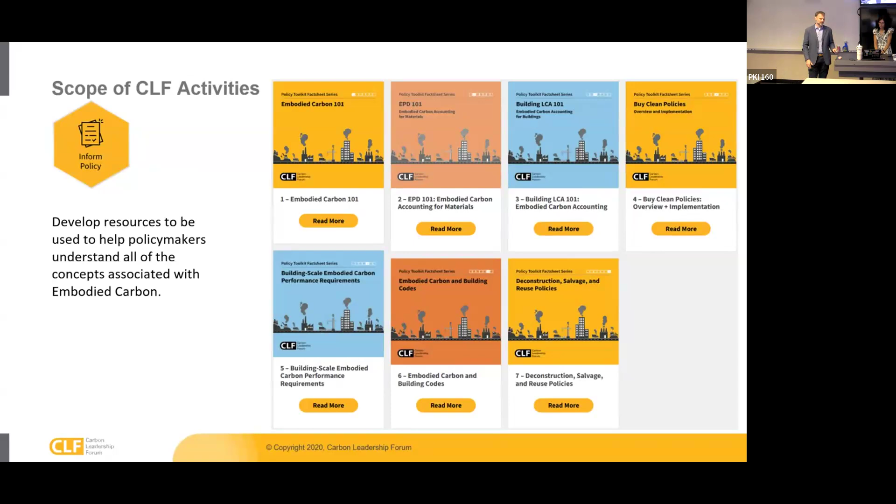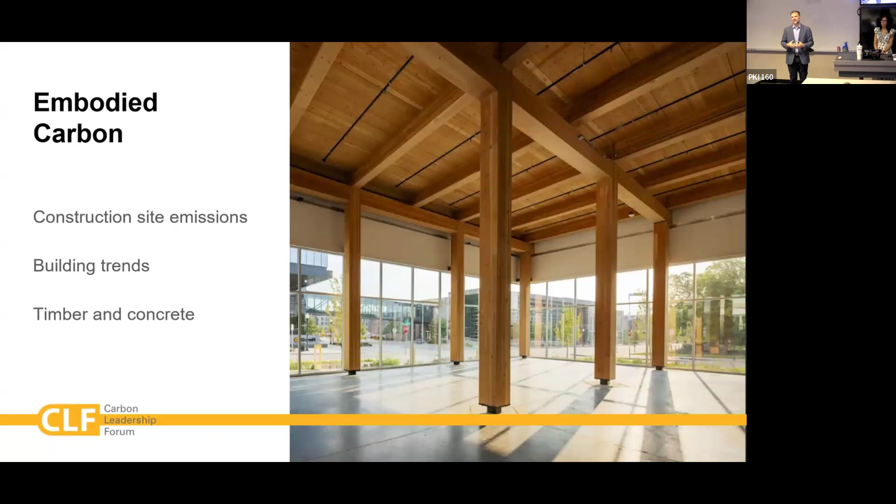So that's an intro. Today we're talking about two sides of this challenge. I'm excited to talk about some of the technical components that comes down to materials and how we use them, and I'll also talk about some of those trends I was just mentioning. You're going to get what, in my mind, might be a more important view, in terms of what's driving this change from the perspective of organizations that have set goals or maybe even experience mandates to reduce their emissions. Frankly, that's who hires companies like mine, and we don't get to do our work unless it's being driven and motivated by corporate initiatives. So I'll pass the baton there.

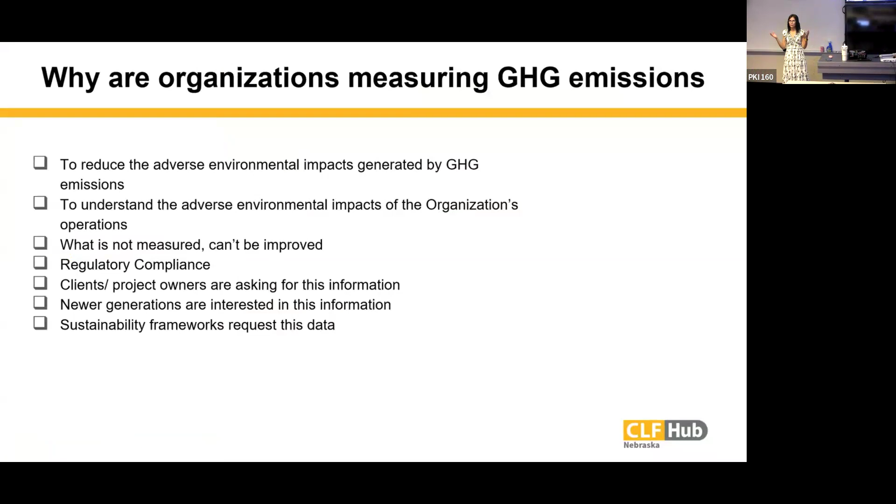I'm going to time myself, I want to make sure I don't steal time here. Okay, so let's start with a common question: why? Why is tracking greenhouse gas emissions important, or why is it happening? Well, as humans, we need to reduce our adverse environmental impact to the environment, right?

So we need to account, okay, we're already having an impact. How much is that impact? How big is it, or how small? What is not measured, we know it cannot be improved.

We know that we need currently to comply with regulations. As some of you might already know, we have regulations in Europe and some here in the US, Canada, and other countries that require us to disclose greenhouse gas emissions. An example of that is the SB 253 from CARB, California. In 2026, we will need to disclose greenhouse gas emissions as Kiewit as a company, but also other organizations.

Why is this? Well, newer generations are asking how companies are treating their employees, the impacts in society and in the environment. How are you doing as an organization? How are you supporting us as human beings?

Our clients are asking for that information. What is your impact? How much waste do you produce? How much energy do you consume? What are your greenhouse gas emissions? And a lot of public companies are required to disclose this information also through frameworks of the SEC. So these are our drivers.

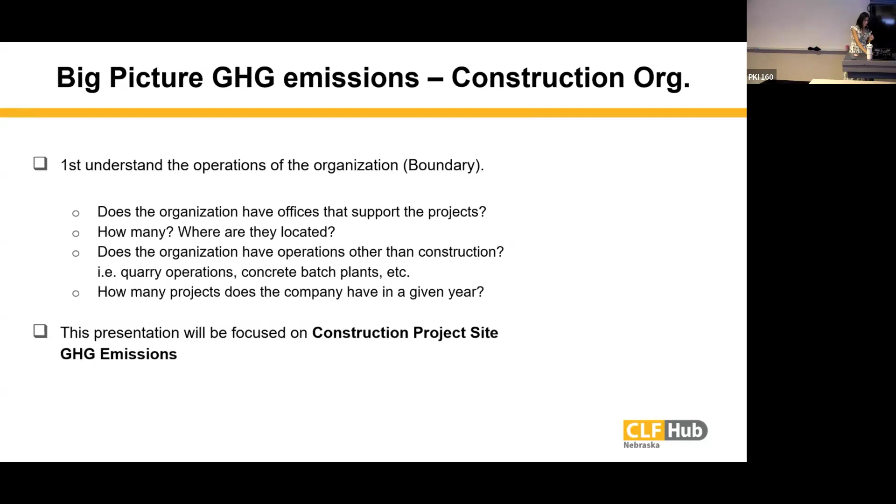So I like questions. At the end of the presentation, we will be able to answer some of your questions, and I hope you have a lot, because I love the interaction. But now I'm going to start asking you guys a question.

What are the sources of energy during the construction phase of a project? Any idea? Making light fixtures? Yeah, that would be from a manufacturing plant. Diesel. Fuel from equipment. The emission of carbon during the hydration process of the cement. Oh, I like that one. Yes, emissions of carbon while we process concrete.

Here is a list. So fuel from the equipment, the equipment is using fuel to operate. Natural gas or propane: we have trailers supporting the project site or offices for that specific project, and they need heating, whether it's propane or natural gas.

Electricity, right? If we're connected to the grid, are we having some renewable energy out there? I decided to put refrigerants last. Refrigerants are not a source of energy, but they do affect, or actually emit, greenhouse gas emissions, so that you know about it.

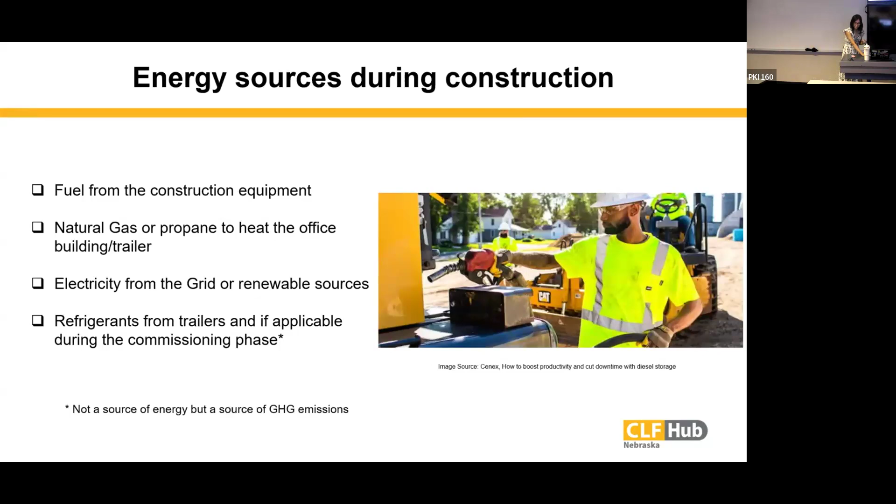But Paulina, where do I find these numbers? Question for the audience: where do we get the number of gallons, kilowatt hours, gigajoules? Tell me.

Excuse me? The engineering management. Engineering management? Anyone else? Electricity is going to be on the electric bill. Yes, in the invoices, right? That's one of other options.

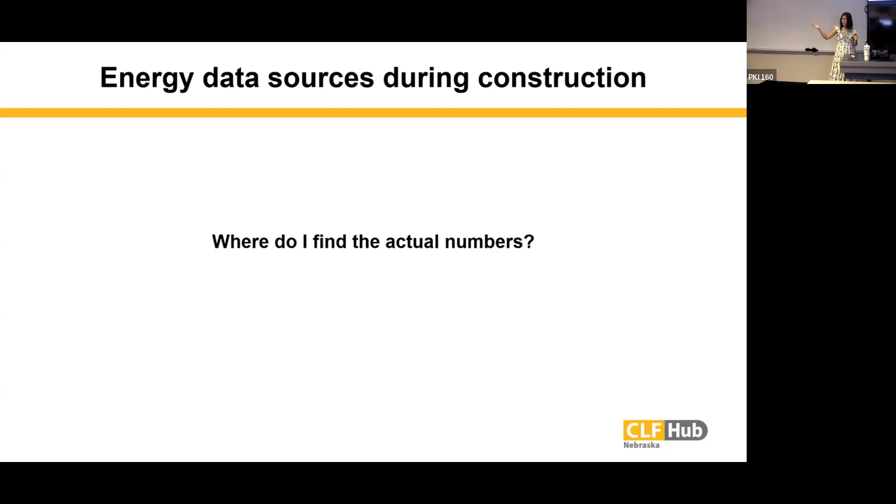So invoices, right? There are some systems in place that organizations have where they actually track this data in the system, for instance ERPs, SAP, Oracle, if you've heard of those. Utilities websites, whether it's not a physical invoice, but an actual website that you can read the measurement. Submeters on site: is somebody actually going and reading on a frequency basis, hey, this is the amount of electricity that we're consuming.

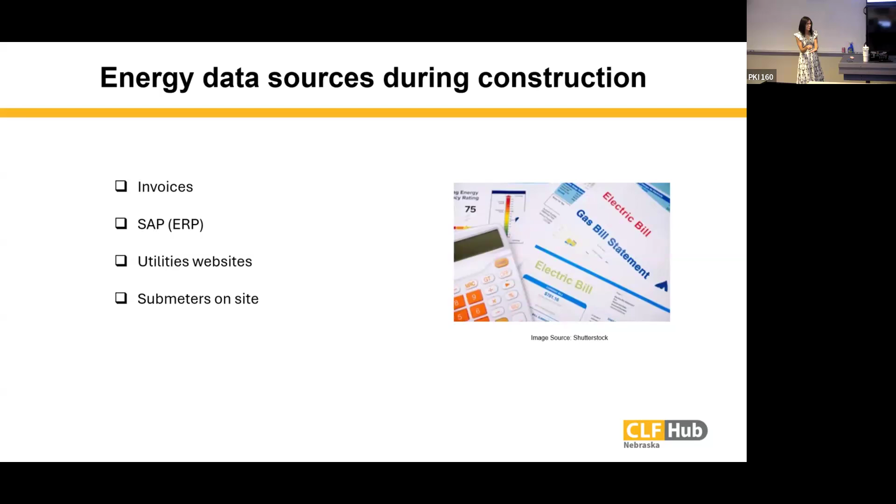So it seems to be relatively easy. We already said, hey, these are the projects that we're going to account for greenhouse gas emissions. These are the energy sources. This is where I'm going to get the data, invoices, or whatnot. And doesn't that sound easy? I mean, let's just do that.

But when we're talking about projects, are we talking about just the one project? How many projects do construction companies have in a given year? 300? And you guys know that projects can go as short as 1, 2, 3 days to 10 years. And they're moving, right? Today I have a project here, tomorrow in Canada, and then I have another team in Mexico. How do I manage and align?

So challenges, every project is different because every project has its own scope. We need to understand what technology out there is available, for how long do we have to track information in the projects. People are rotating.

Let's say about systems in place. Does the company already have a standard procedure to say, in all the projects, we will have this job position, assign this task to track fuel consumption? And if not, how do you communicate that? How do you standardize it? Where are they going to track this information?

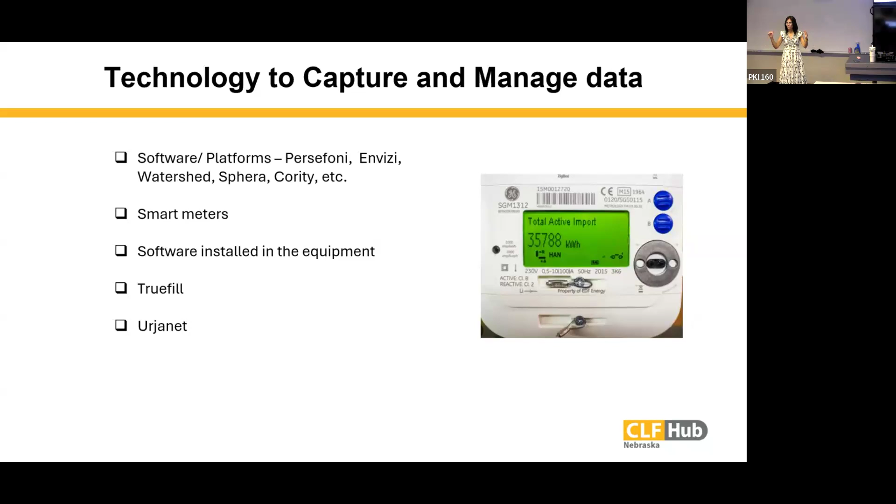Hey, is there any software, hardware that I can connect to the equipment that can actually tell me how much fuel we went through? Truefill and Urjanet. So Urjanet is this one system, website, that gathers the data from different utility companies and can give you the report for the companies that you want. So if I have 100 projects, I make sure that they are all providing me with access to the utility companies, and then I can download actual data from that report. Instead of having a person printing or filing the invoice, tracking it in SAP or in Excel so that it gets paid.

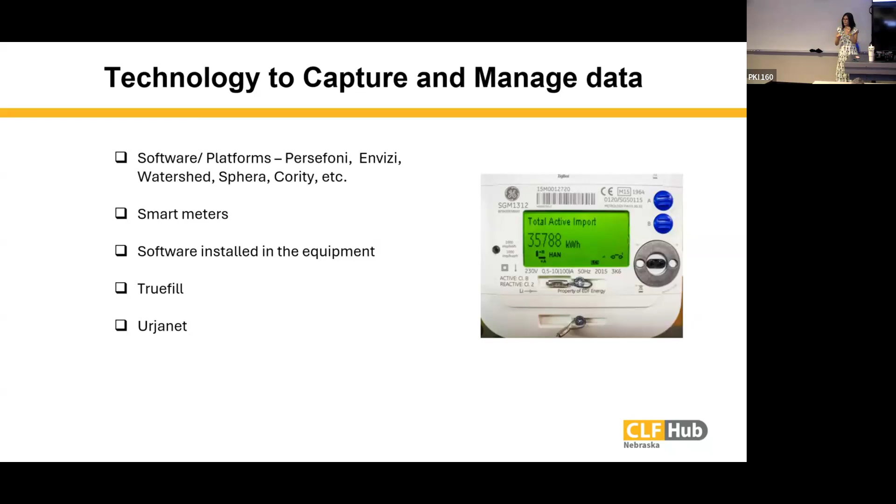I'm not going to go into detail on how to calculate greenhouse gas emissions, but wanted to make the connection of energy with that energy consumption, whether it's gallons of fuel, gigajoules, kilowatt hours. Then there is this greenhouse gas protocol, which is very well used, that guides us on how to calculate greenhouse gas emissions. And there are databases that we use to convert these energy numbers into greenhouse gas emissions.

Here to mention some is the TCR, the DEFRA, the EGRID from EPA. They are not the only ones. I'm just sharing an example.

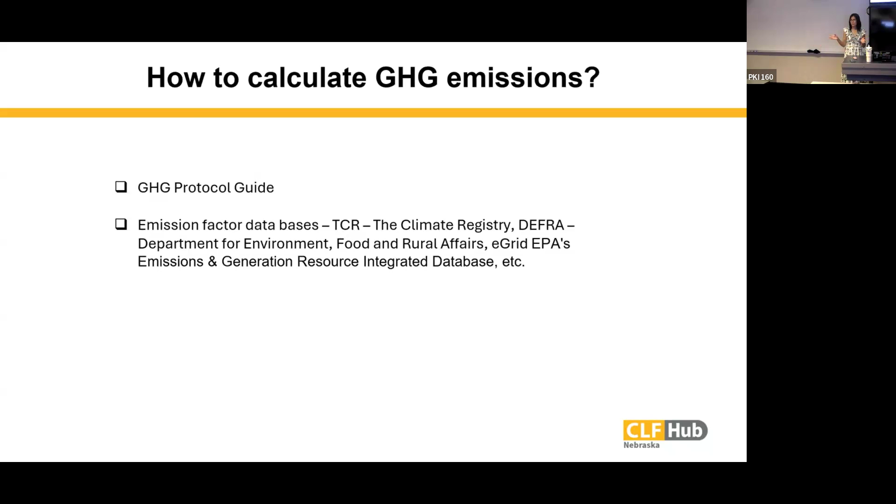Challenges for reducing fuel consumption: we're talking about the data tracking. How do we track the data? How do we standardize processes? We need to make people aware about how, in our operations, we are emitting greenhouse gases, right? How do we train them? What policies do we have in place to reduce those greenhouse gas emissions? And within the next slides, I'll share with you some of the practices we have in Kiewit to help support the effort.

The problem of working in remote sites is something I will also talk very fast on. But if we are trying to go to electrification of my construction fleet, and I am working in a remote site, how do I actually use that electric fleet if I cannot even connect to the grid? Those are challenges.

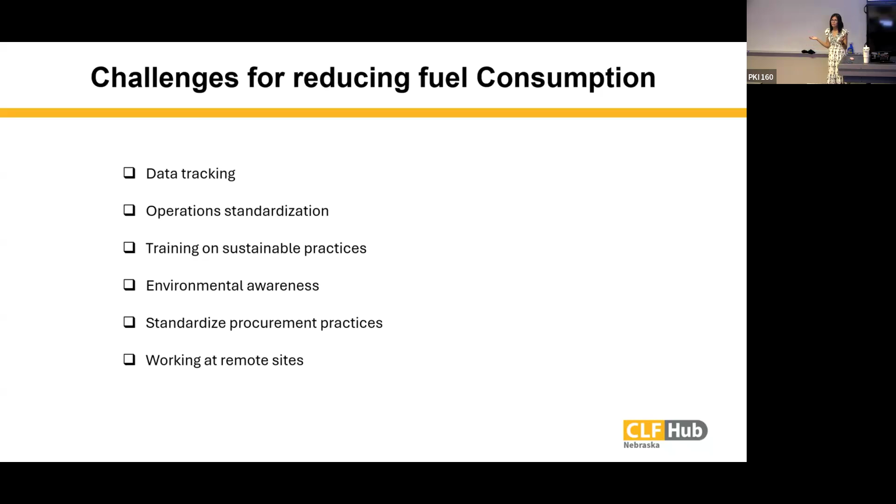So finally, I just want to showcase Kiewit's actions in relation to greenhouse gas emissions. So since 2009, we have prepared our greenhouse gas emissions inventory. We already have it third-party verified, which means we get audited on how we're calculating these emissions, right? What is the methodology we use? What assumptions are we considering in this?

Not surprisingly, our main source of scope 1 emissions, which is our direct emissions as a company, is the fuel consumption, specifically diesel. So we are working very closely with manufacturers so that we can try pilot projects to see if with the new technology that they are putting in their equipment, we can reduce fuel consumption.

I was talking some about how can we reduce fuel consumption, specifically challenges. Are there policies in place in the organization? We do have a policy, the anti-idling policy. It tells us that we should not idle for more than 5 minutes. This helps us reduce fuel consumption, noise for the community, right? Costs, and greenhouse gas emissions.

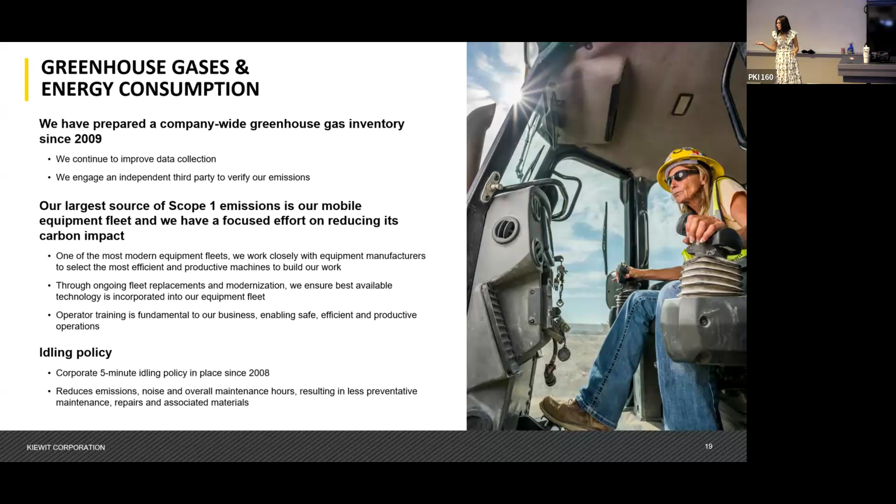When we're talking about other things related directly to fuel, what are you doing to reduce your adverse environmental impact? We're looking at ways we can use renewable diesel and biodiesel so that their use affects the environment less.

We're adding battery electric vehicles and energy storage systems where possible, as I mentioned. If it's possible, we'll do it, depending on where we're talking about.

We have machine control technology that tells us how frequently we need to give preventive maintenance to the equipment, so that it continues to be efficient and we reduce fuel consumption too.

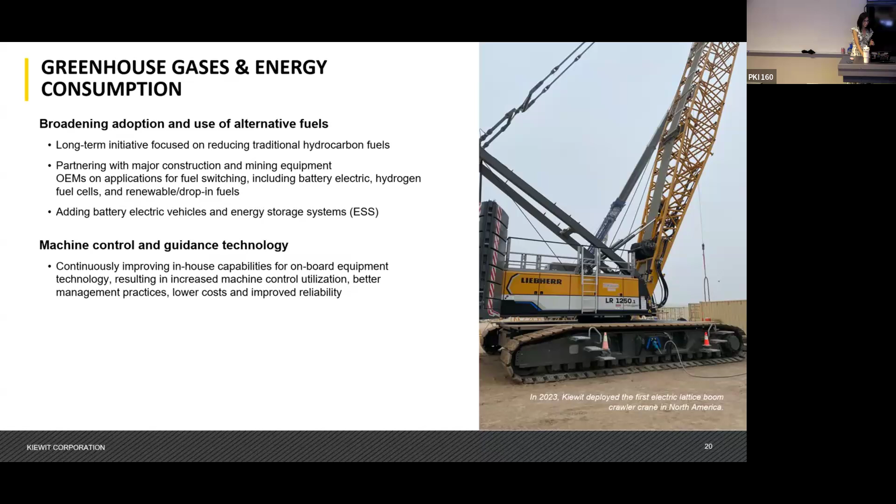Something I want to point out as a last comment relates to our data analytics. I was telling you, wouldn't it be great if we could capture the fuel consumption per piece of equipment? I think that's amazing. Well, we've had telematics for years as a company, since 2014.

Does anybody know what telematics is? It's hardware and software that we install in pieces of equipment, and it gives us different data about the equipment. An example would be: how much fuel did the equipment use? How many hours did it run? When was the last time I changed the oil?

Or whether people are putting on their seatbelt for safety reasons, etc. And then we capture the data and we can follow up accordingly, or play with the data and do the analysis.

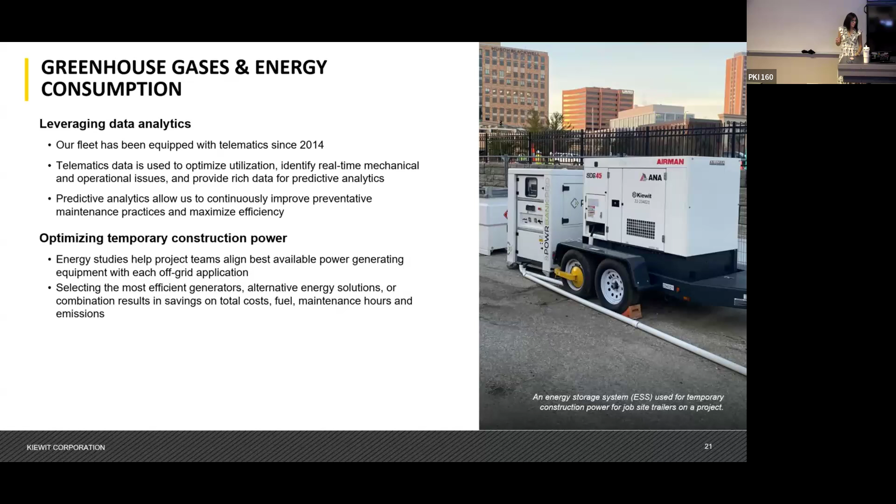And then finally, very fast, I just wanted to share with you that we are electrifying our fleet. One of the challenges is we cannot just go from day to night in electrifying our fleet, because first of all, there's not a lot of construction equipment already developed and manufactured that is electric. We will also need to connect to a grid, and we currently work in remote areas.

Think about the time it takes to charge electric equipment in construction. Would we need to wait for the operation to happen because that equipment is charging? Imagine the delay on the schedule. So those are things to consider when we're talking about electrifying our fleet. Thank you.

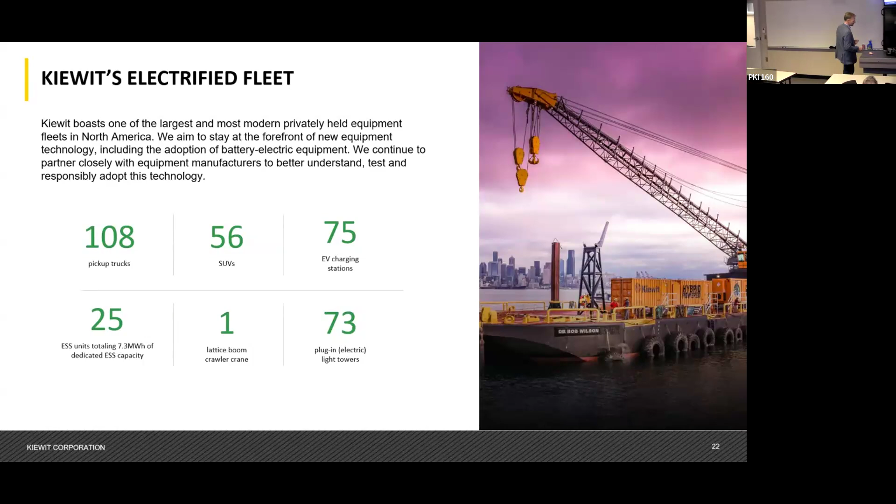No, we have until 1:15, but yeah, it's great if we can. Okay. Yeah. The 1 o'clock is a good time. Okay, great.

If I summarize what I want to share today, it would be that we need engineers to help us move beyond energy to address emissions, which is technically kind of complex, but it means getting beyond just the part we control, understanding the systems we're a part of, like what this map is, where energy is produced, how energy is produced.

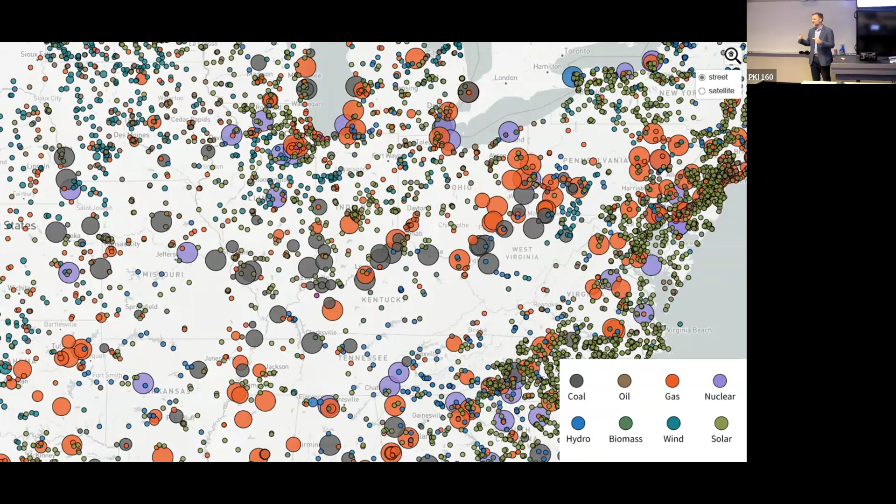The other thing is I think we need engineers to reach out more to our counterparts, like in the corporate world, where we're starting to see accounting practices incorporate emissions impacts, but also to ecologists and environmental scientists, because carbon isn't enough. In fact, if we focus on carbon only, we might be making bad choices from an endpoint analysis. I'll say that again at the end, but that's what I'm hoping to share with you today.

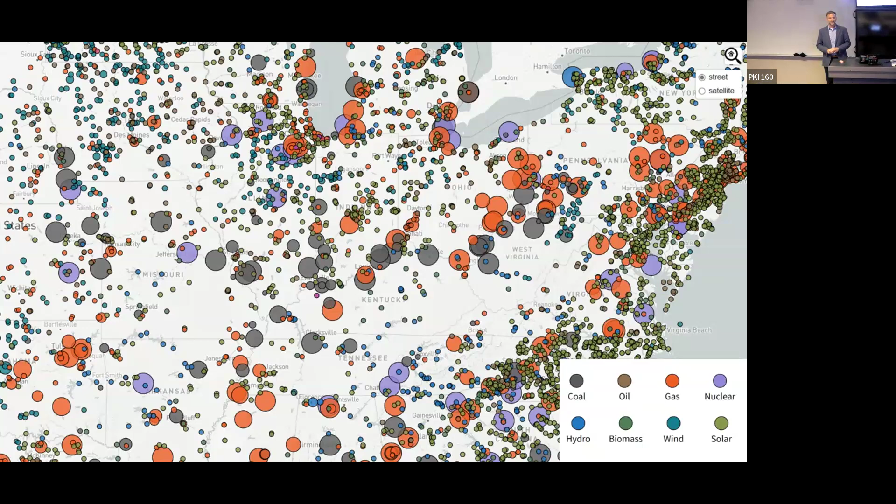This just shows the gray dots—that's where we're still using coal. I think the orange dots are natural gas, which is what we're trying to shift our fossil production towards. And then nuclear, we're working on micro reactors and small modular reactors. Those are exciting things for engineers.

The challenge with energy is when we can have it from these sources, and this is part of what we need help solving from a storage perspective. Buildings don't just take now, buildings also give—they're sources for energy production. We put renewables on buildings, especially solar.

But we're also putting back electric batteries, battery energy storage systems, and thermal energy storage in buildings too. And those are interactive—they can be dispatched remotely. Increasingly, I think we'll see utility companies providing incentives to gain access to those private resources to improve grid resilience. So this is what I mean by engineers needing to go beyond just the energy component.

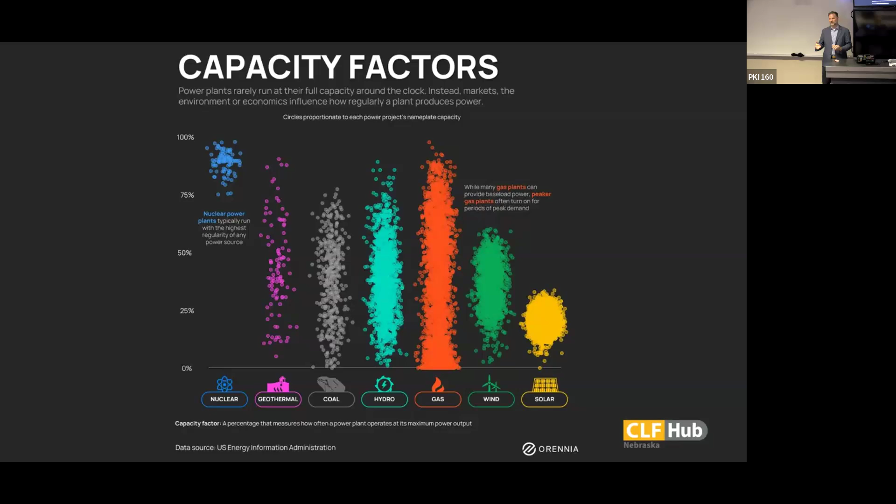Net zero isn't meaningful from an energy perspective, because the energy you get back to the grid may be different in quality than the energy you take from the grid, depending on when, right? The time of use matters a lot.

And let's see, did I jump? Yeah, so this is just to let you know that we have predictions on what will happen too. This is scenario planning, which engineers increasingly—I think we're designing assets for at least a couple decades, hopefully more—so our assumptions should be based on some reasonable scenarios.

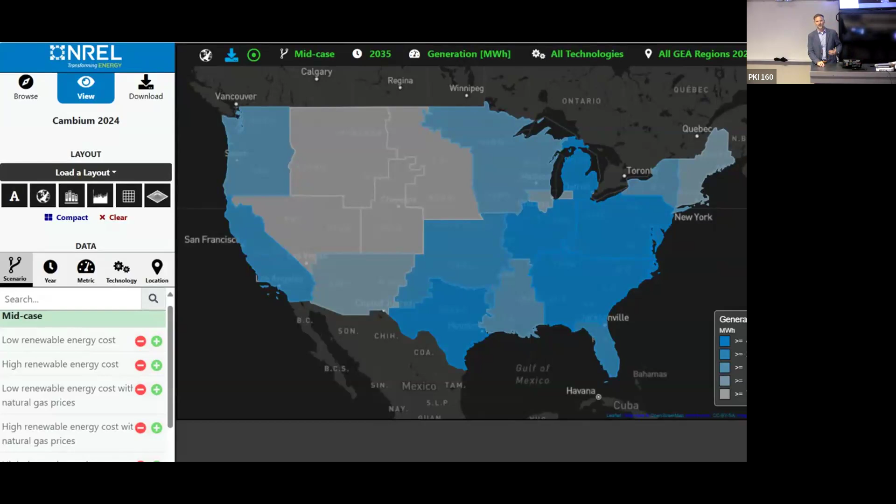NREL provides the scenario viewer for the electricity grid, which projects what emissions will be like. So when we're making decisions about the emissions impact of, say, putting in a heat recovery chiller versus geothermal water-to-water heat, we make these technical decisions. Looking at the current state of the grid for what the ecological impacts are isn't going to be predictive enough—it could potentially be very wrong in terms of your estimates.

I want to talk a second about energy, because in my career, energy has been the focus. I spent a lot of time optimizing enclosure systems, getting rid of thermal bridges, passive design, and then optimizing systems. We've all heard reduce loads, then optimize, then renewable. We've learned all about energy, but we have a ton of it. In some ways, I think energy use is correlated with quality of life. We don't need to necessarily be afraid of energy. It's an abstract thing.

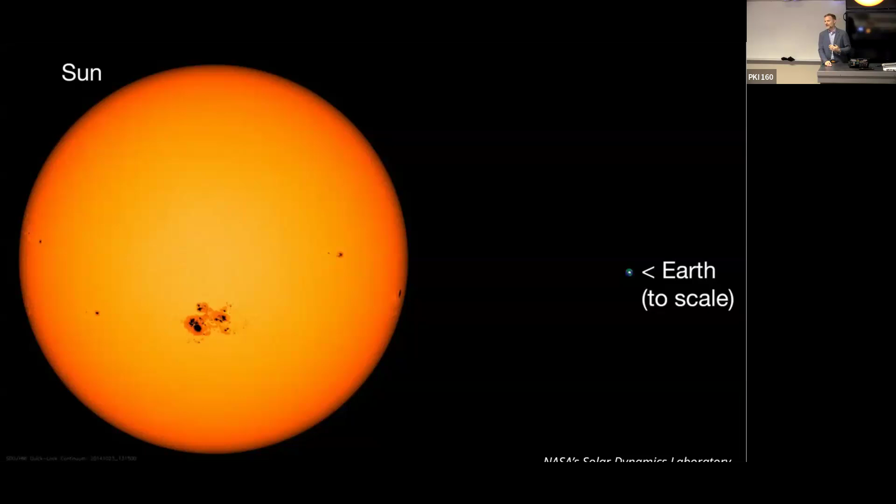This is just to let you know that there's a science here that we need to begin engaging with. That's what I mean by connecting engineers, reaching into the environmental world and this science of life cycle assessment, where we are directly impacting these midpoints, which are all these little items. Global warming potential is one of them. So the Carbon Leadership Forum is currently pretty focused on that, but CLF brings this approach.

When you study the emissions impacts, you're actually dipping into this literature, which is very rich in terms of our ability to also address water quality, toxins for humans, and these other endpoints that actually are what we care about. So not getting hung up on energy or carbon per se, but how are they ultimately related to quality of life?

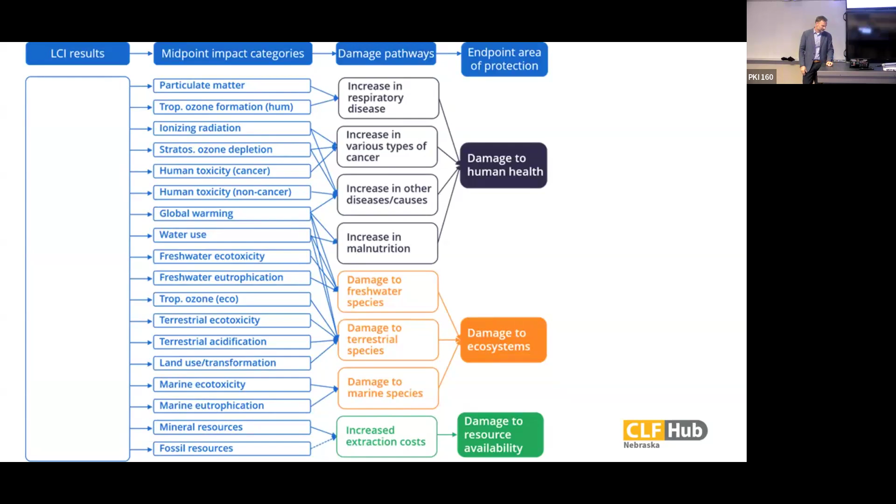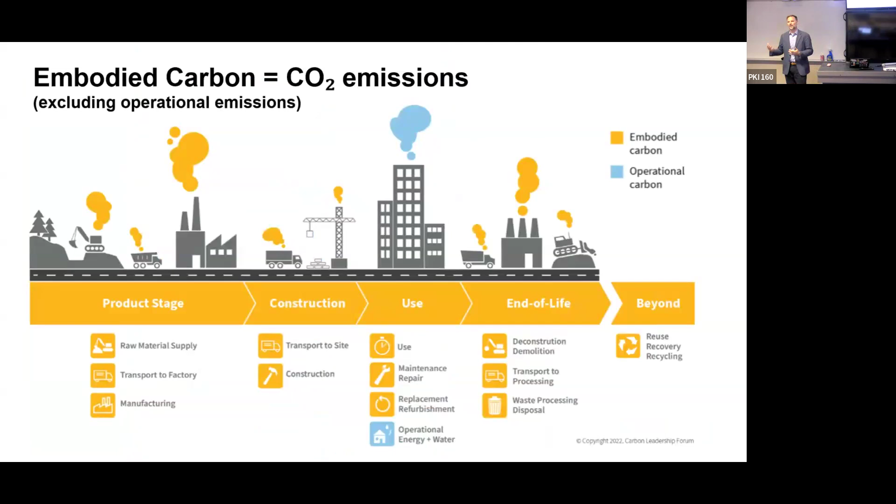And the complicated science of scenario and Bayesian inferences and things necessary to connect those. When we talk about CO2, we talk about the whole life of a building. The Carbon Leadership Forum is really focused on the upfront emissions because they happen right now, and there's direct market signals we make with direct emissions. So there's an urgency that's not as compelling as operational emissions, because those are predictions we're making about what will happen.

And we have goals that are pretty clear. The AR6 report updated it to know how much our budget is. So it's not like we're just trying to reduce to be good stewards. It's that we're actually trying to stay within an allotment that there's been global agreements around, right? We've made commitments as a society, as a nation, to our nationally determined contributions.

And the Science Based Targets Initiative has made this really simple for you. Buildings cut across many sectors in our economy, and the United States budget for emissions up through 2050 is split up by those sectors. There's not a building sector. But Science Based Targets just recently, last year, did the hard math of figuring out, if you just looked at buildings across those sectors, what would the budget be for different types?

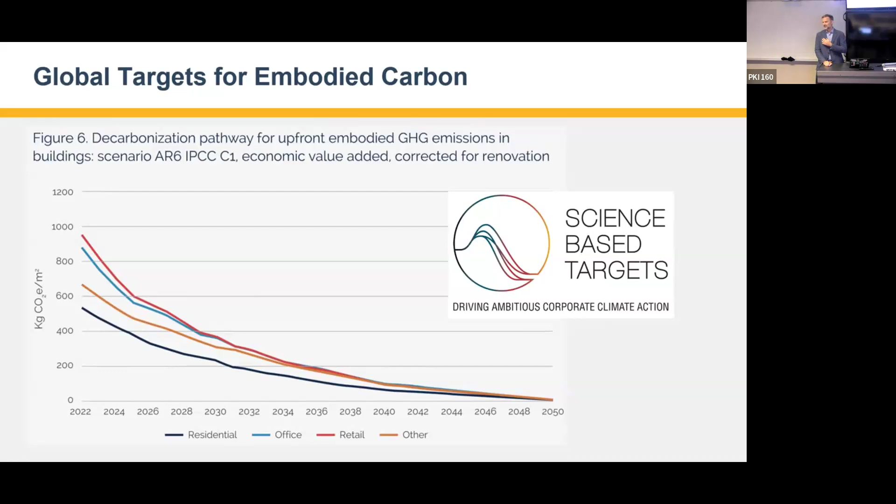So those different colored lines are different types of buildings. And if you look at a different country, the chart changes also based on what that country's nationally determined contributions are to the budget. So where you do a project matters for how much emissions you're permitted, and what type of building is actually an important factor too. This is very knowable information, even though none of us are currently really using it. It's becoming more knowable with all the legislation we're seeing. This is a bit outdated now, but this is a graphic that shows California leading the way.

Europe has been requiring the CSRD for at least 5 years now, which first targeted operational performance for buildings, but now has also started to tackle these other upfront components.

Kiewit, what's CSRD? Corporate Sustainability Reporting Directive, I think. Thank you for that.

That's a cross-cutting measure. Again, most of the legislation is aimed at states that have taken the initiative, like California, which a long time ago, probably at least 5 years ago, committed to buy clean for its own state facilities. But only recently, I think 2 years ago, through CALGreen, did they make that a requirement for all construction projects, that they meet the buy clean thresholds for concrete, steel, insulation, and glass.

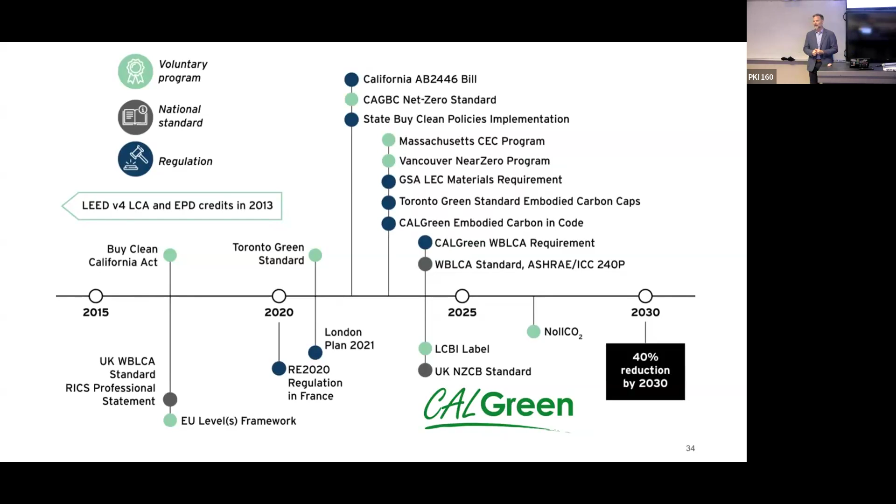So that point was let's get smarter about our emissions, because while it's complex, because of the dynamics of time, like year over year, we're designing assets, and the dynamics of our grid seasonally and even daily. Those are all variables in this equation that engineers have a direct influence on.

So if you just look at energy, you're missing the importance of those ecological impacts. But engineers are well positioned, especially at the building level, to tackle this. I'd say maybe even more so than folks that are managing those systems, you know, the utility providers and the district energy managers. They have to deal with the loads that are coming from the buildings, whereas the engineers can help manage that.

So let's get into a little bit of detail. Concrete's the largest source of construction emissions currently. And concrete's a composite material. It's pretty hyper-local. The batching plants that mix up concrete and send it to the site are normally within 15, 20 miles of the project. But that doesn't mean that all the ingredients to the concrete are hyper-local.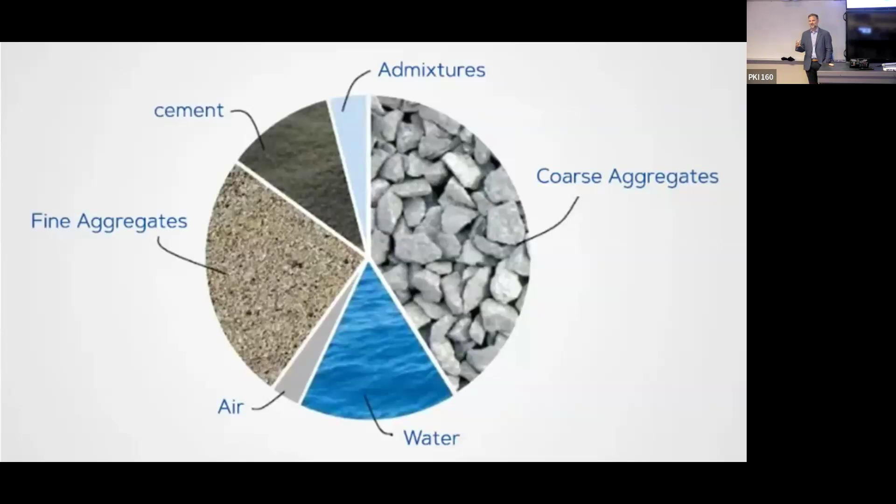Cement is the most significant contributor to pollution in concrete, and you can see it's a fairly small portion of the actual mass of the finished mix. But as the binder, it's the most important part also.

So you can think of this as sort of the people who are paying the cost of our concrete use, because there's an equity and social justice component to this also. It's not just carbon that's emitted from the production.

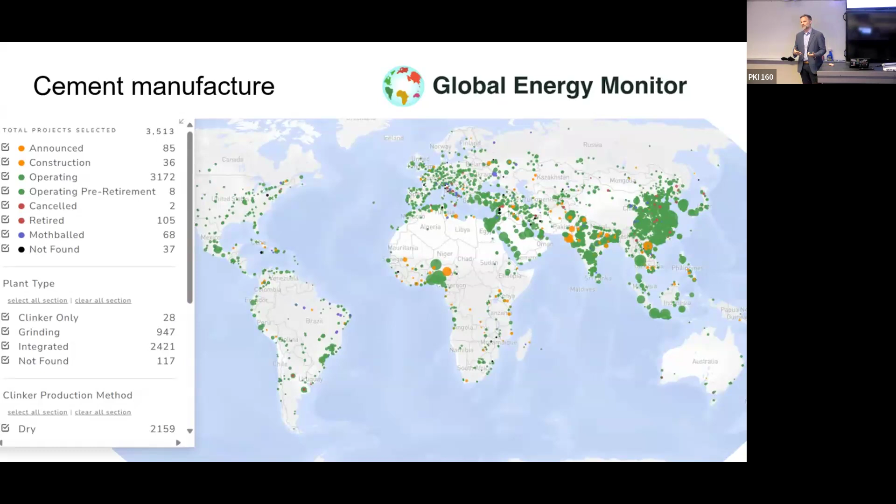Clinker is what you use to make cement. You grind up the clinker. To get clinker, you have to melt limestone. When you melt the limestone, it produces a lot of emissions, and it takes a lot of heat, which typically produces a lot of emissions too. So even if you electrify somehow the cement production, you still are having a huge amount of emissions just because you have to melt limestone in order to create the hydrolysis of that reaction.

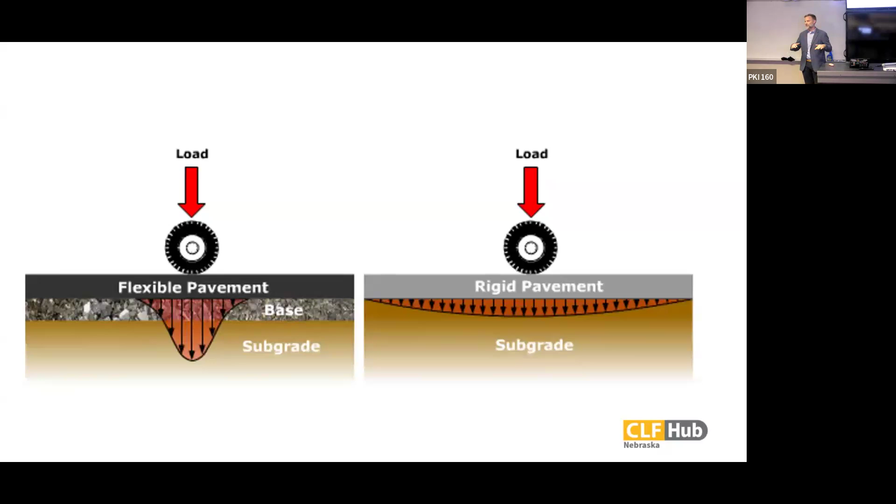So one side note is it's not the only binder in town. We do have, especially for exterior, for outdoors, flexible pavements that we use a lot. And these have a much lower embodied carbon. I'm realizing I put in a GIF, that's kind of fun. But you don't have to design rigid pavements.

And this is probably one of the easiest ways where you can switch out of concrete. That's a smart choice. We'll talk about timber next as one of the key options you have as a replacement for concrete in structural design.

You feel like taking questions?

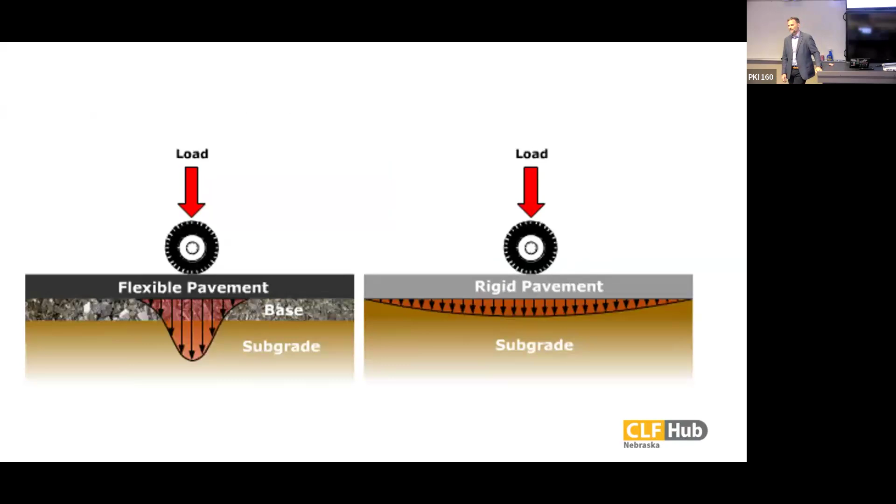Yeah. In the last slide, it occurred to me, does a flexible pavement have a drawback that it requires more power to the car to drive across it because of more friction? Maybe, but you know, they take that into account in the LCA studies. They talk a lot about vehicle lane miles and stuff like that. When they talk about the use phase of a product, they include the differences in performance during the use of that lane and mile of highway or whatever.

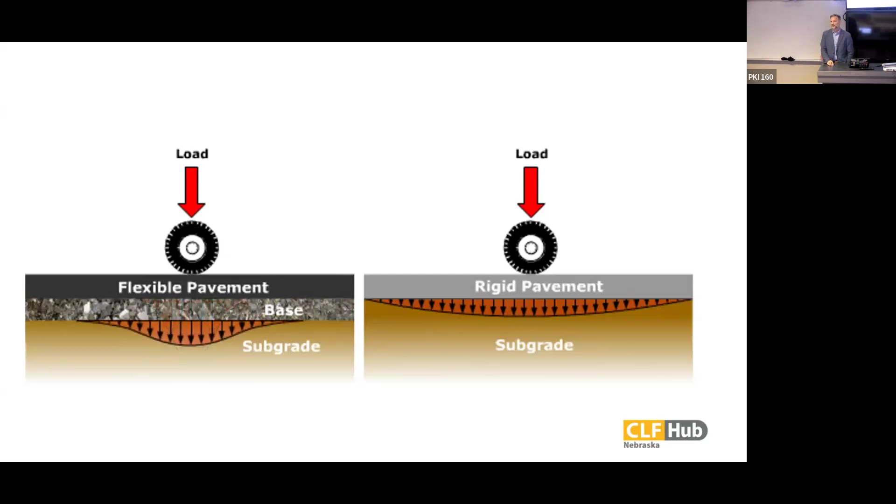So yeah, there's a rich literature here for us to draw on. And I don't think we can become experts in this, but we need to find our experts and help support that emerging industry so that we have more consultants capable of helping us bridge to this science of ecological impact. So we have a lot of options for other binders.

A lot of these are unfortunate replacements, like fly ash. We get fly ash from coal plants, so creating a strong secondary market for fly ash probably hasn't been the best thing. Similarly, slag comes from blast furnaces for steel production.

So again, we're creating a secondary market for a byproduct from something that has a pretty negative impact. Steel is one of the largest emitters in construction after concrete. I think you even get slag when you recycle steel, like in an electric arc furnace, so that's probably the best way.

You've heard about green steel, which comes mostly from recycling in these mini mills that use electric arc. But you can also use pozzolans, which can be natural—you can grind up volcanic rock, and that has a pretty effective use as a binder, not as a complete replacement. Similarly, you can grind glass, and it can replace some portion of the cement, maybe 10 to 15%.

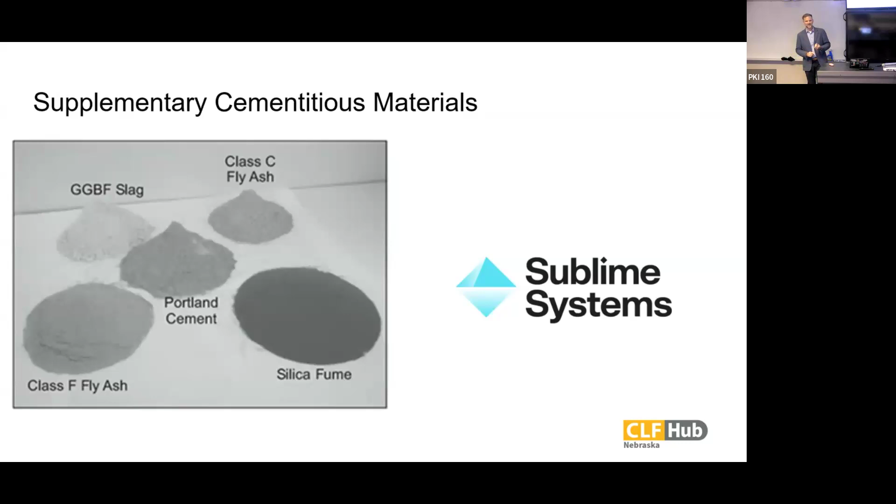Sublime Systems is working on the chemistry of creating a cement that performs the same as ordinary Portland, but is done with electricity and water somehow—electrolysis. So there's a lot of investment and innovation in that space. Those are things to keep an eye out for in the space of concrete.

I think the high-level summary there is concrete's the starting place for reducing construction emissions, and finding alternatives is the best way. We don't have a way of abating concrete production that's ready to scale—it's still in pilot phase.

So timber's exciting, and we love talking about it from an embodied carbon perspective. There's a lot of momentum, but I want to temper your excitement a little bit. This is my point about going a little beyond the carbon—carbon is kind of what we consider a midpoint outcome in a life cycle perspective, and it's not necessarily the end point that ultimately matters.

But mass timber is the type of construction we're seeing grow. Half of construction is already wood—it's residential and light frame, and it's pretty efficient. Generally, light frame wood construction is panelized systems with ribs that are studs and plywood. It's a very good way to build.

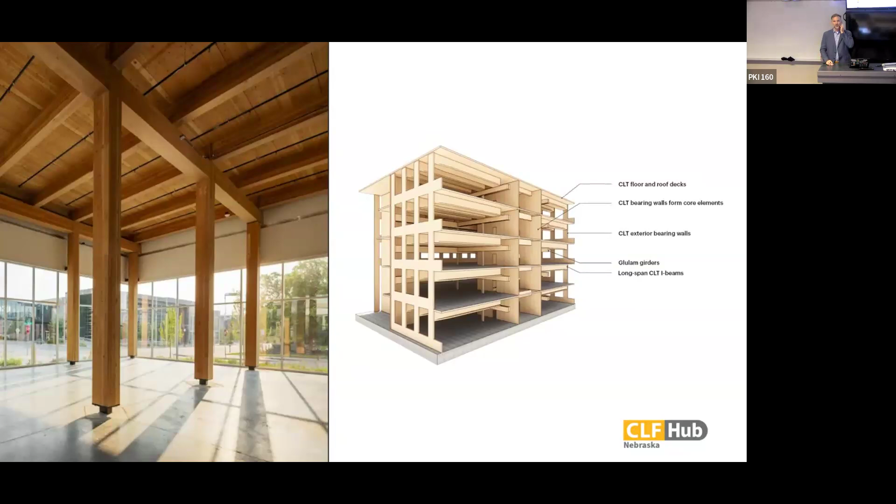Mass timber is probably a little less efficient structurally, but it can accomplish larger spans and do things we want, like fire resistance for commercial construction. So that's the allure—it's also beautiful if you can leave it exposed in structures. There's almost always a topping, so you're not really walking on it, but the underside of cross-laminated timber is often exposed in these buildings.

There's a lot of building codes now that broadly accept mass timber, so we're seeing more uptake. Initially it was really a European product, imported because there were no factories here making cross-laminated timber, or mass plywood, another type of mass timber—it's just like super plywood sheets. But I'd say we're spinning up our industry in this regard.

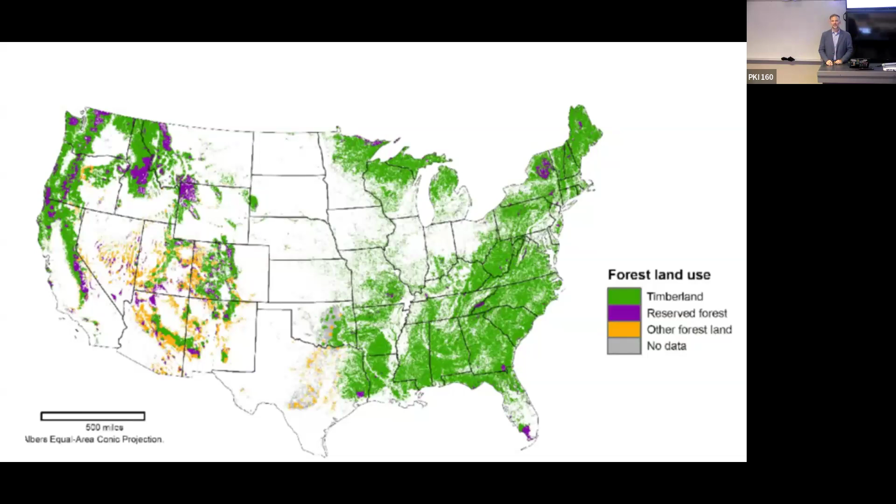There's been some bumps along the way—a large wood startup went bankrupt out on the West Coast a while back, forgetting their name right now. But anyway, we might think of our forests as the Pacific Northwest, but actually most of our wood's coming from the Southeast, and that's loblolly pine, from plantation planting for the most part—rows of pines, all the same age trees, and then clear cutting for that production.

And largely that's displacing other types of forests. So you could call it a forest, but in the jargon, you'd call it timberland or managed timberland. It doesn't mean it's necessarily being harvested, but that it's in that space. So it's an interesting world.

I've been trying to learn a lot more about it, but the World Resources Institute has an excellent report that I think is a nice counterbalance to a lot of the marketing you're hearing from the American Wood Council and Woodworks Inc., which are industry associations set up to be green for us and make it look like it's our way out of a problem.

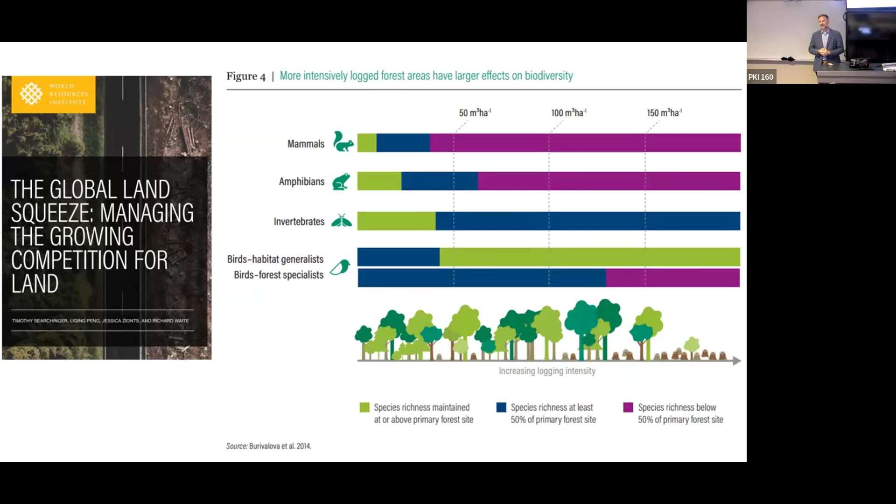When we increase wood production, we're creating competition for ecosystems and land use change. The forests that produce wood are not of the same quality and don't create the same ecosystem services as forests managed as forests, not as timberland. Again, there's a rich science here—most of the carbon's in the soil, and currently our definition of sustainable forestry is just that you're not depleting over time the amount of carbon stored in that system.

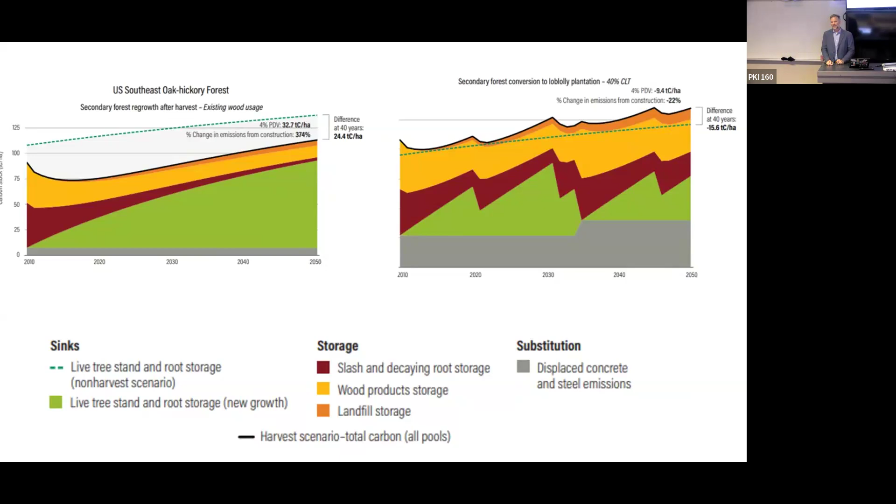So what exactly is happening there? I'm not quite educated enough to tell you, other than I want to communicate that even if this is a carbon no-brainer, it may not be the right choice for us to be increasing the rate of change of land use to plantation pines in the southeast.

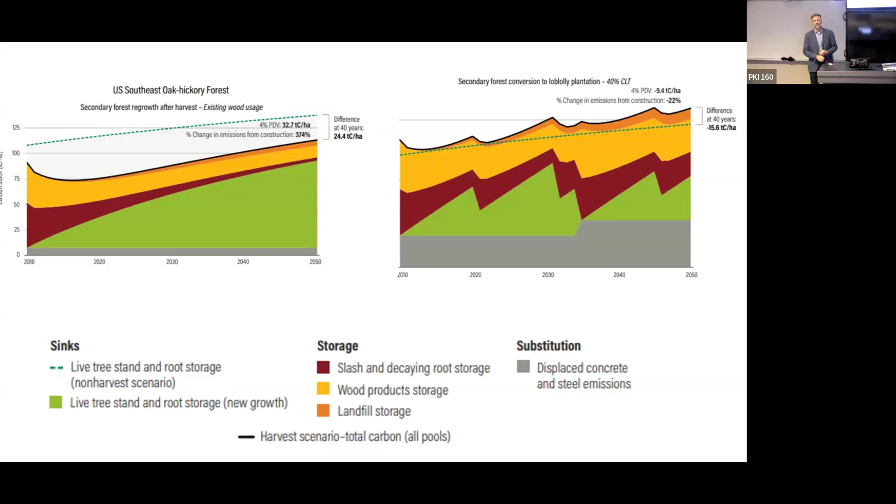These are biodiverse regions, so I've got quite a few maps. I think that's maybe an undercurrent in this presentation: paying attention to the geography of our impacts matters more than ever, especially as we start to tackle biodiversity. Where you build changes the impacts that your building will have, and so it should change your design concept.

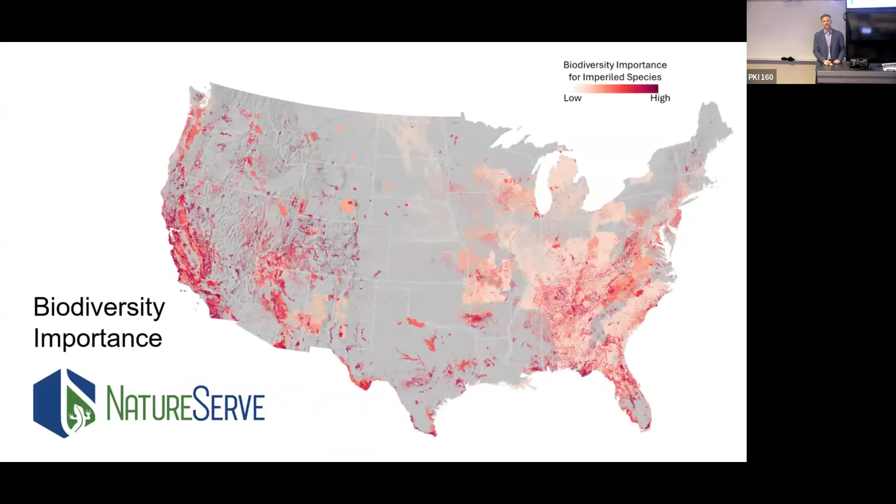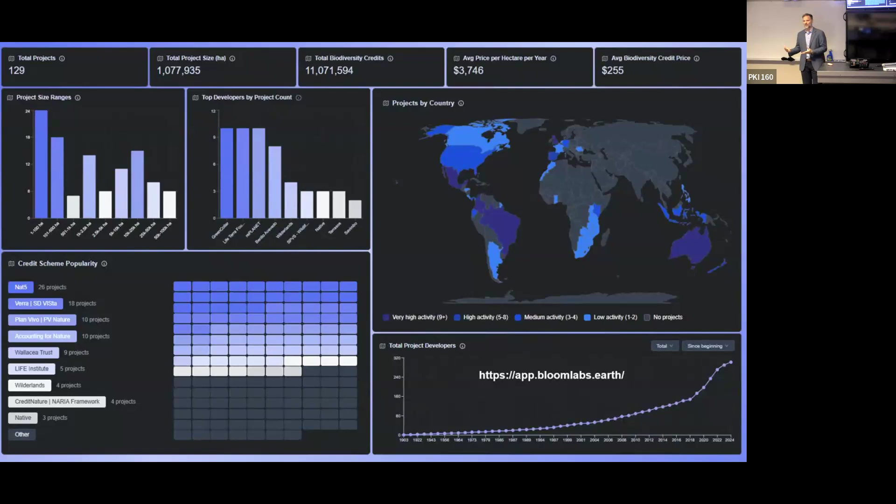There's also great potential, because our economy is the way we've achieved so much as a society. I feel like it is our most valuable resource also for creating more intelligent decisions as an industry when it comes to construction. So getting familiar with what these credits mean, trying to be a steward of intelligent use of them, and vetting so we don't repeat some of the problems we've seen in the renewable energy market with RECs, or in the carbon market with carbon offsets. This is a chance to do better in terms of creating financial instruments that really lead to the change we want to see. Thank you.

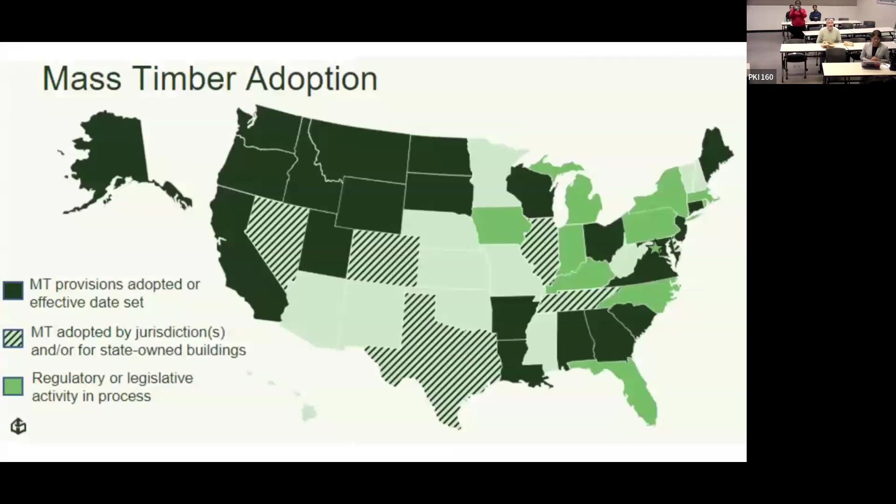So I guess I'm wondering, am I interpreting this correctly? And if we stacked up all those other ones, is it still going to be high — like if we stacked up all the standard performance building stuff, operation versus embodied? Right, about half and half.